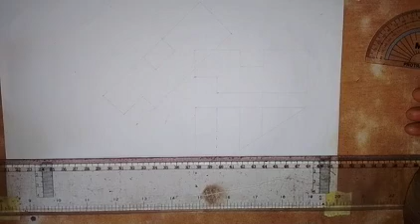Welcome to my channel. Here I'm going to show you another method to draw a polygon of any number of sides. This is a general method, and in this case we are given the length of side. I'm going to construct a 5-sided polygon, a pentagon, with side length of 40 millimeters. Let's look at this general method.

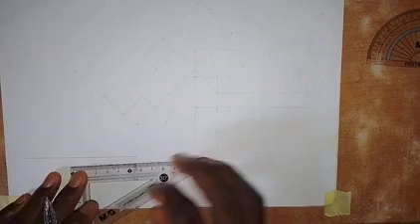First we draw a horizontal line of any length, then take a ruler and measurement. On this line I'll take a measurement of 40 millimeters, so from here to this point is 40 millimeters.

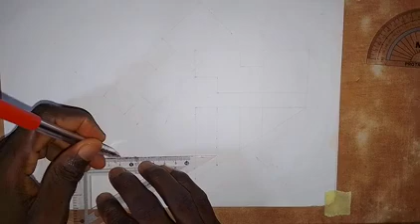I'm going to label this point. I'll call this point O, and this point B. Next I'll take my compass, put the pinpoint here at O, and extend it to point B. So OB is 40 millimeters, and I'm going to draw a semicircle like this.

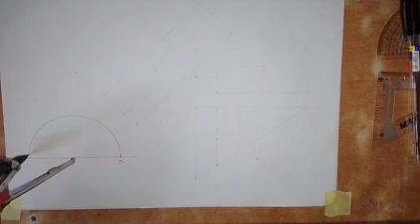Wherever the semicircle touches this line, I'll call this point A. Now this semicircle we are going to divide into 5 equal parts.

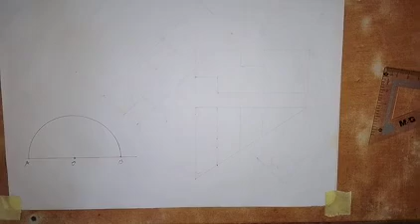Because we are constructing a 5-sided polygon, a pentagon, we have to divide the semicircle into the number of sides of that particular regular polygon. The semicircle is 180 degrees, so if we divide 180 by 5, that gives us 36 degrees.

So we set our protractor here at this point, with the midpoint on point O, making sure the horizontal line on the protractor is on the line. Here we have 36 degrees. The next is 72, since 36 plus 36 gives us 72 degrees.

After 72 degrees, the next is 108 degrees, marked at this point. The next is 144 degrees, marked here. The rest is 36. So we have points 1, 2, 3, 4, and 5, ending at 144 degrees.

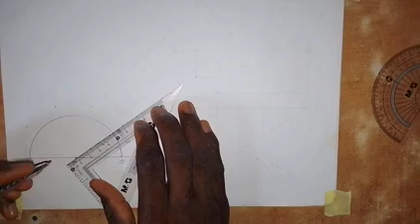Next, from point O, we draw a line through each point marked on the semicircle. We draw a line like this, then from O through the next point, and so on through each of the points on the paper.

We are going to number each of the points on the semicircle. If this is point 0, this is point 1, this is point 2, this is point 3, this is point 4, and here we have point 5.

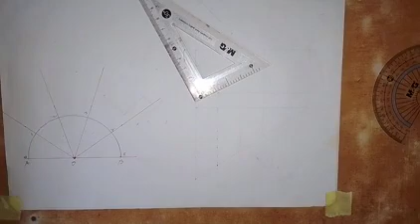Now we make use of point 2 here. The distance of point 2 from point O is 40 millimeters - look at it, this is 40 millimeters here.

So whether you are constructing a 5-sided, 6-sided, or 7-sided polygon, you have to make use of this point 2 as the first point, and the distance from O to point 2 equals 40 millimeters, the length of the pentagon.

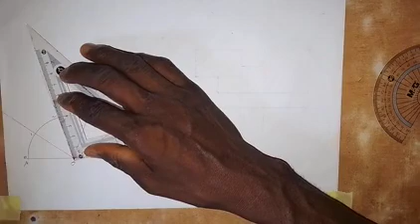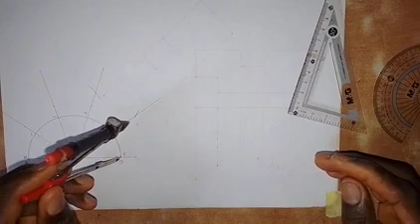We still have that 40 millimeters on the compass. From this point 2, we make an arc on this line, and then from point 2 we make another arc on the next line. From O to point B is also 40 millimeters, so we can make an arc like this, still keeping that 40 millimeters.

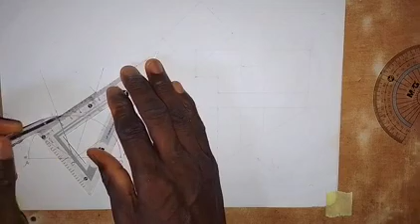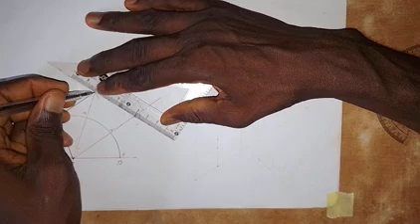All that we need to do now is join these points together. We join point O and 2 together with a thick line. Then from this point to this point we join them together, and we also connect this point together with this one, and then this point too.

Let's call this point C, this D, and this E. So we have a pentagon O, B, C, D, and E. This is how to go about it when you are given the length of side of a regular polygon, as simple as I've done it here.